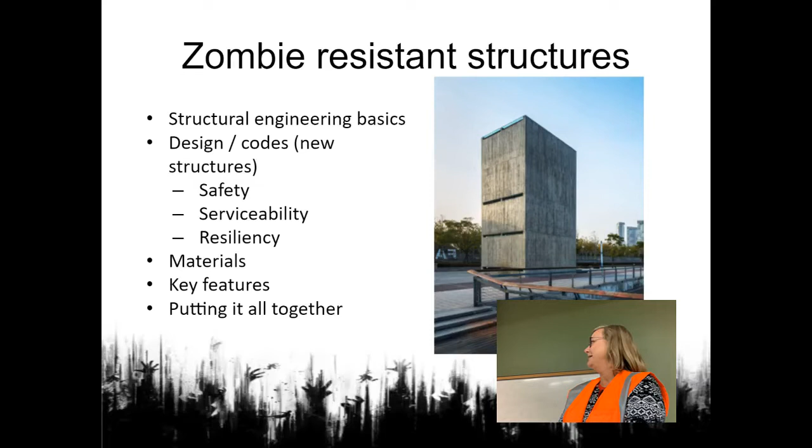We're going to look at what are the key features that we need to have for our zombie-proof housing, and how do we put this all together so that you can start making your plan as we go forward.

All right, here's my one equation. For structural design of the stuff I'm talking about, we basically follow what's called Load and Resistance Factor Design, LRFD. All you need to know is the left-hand side is the loads, so that's the weight of the structure, the zombies, the earthquake, the whatever. The right-hand side is the resistance. This is the strength. What are you making it out of? How big is it? All those types of things.

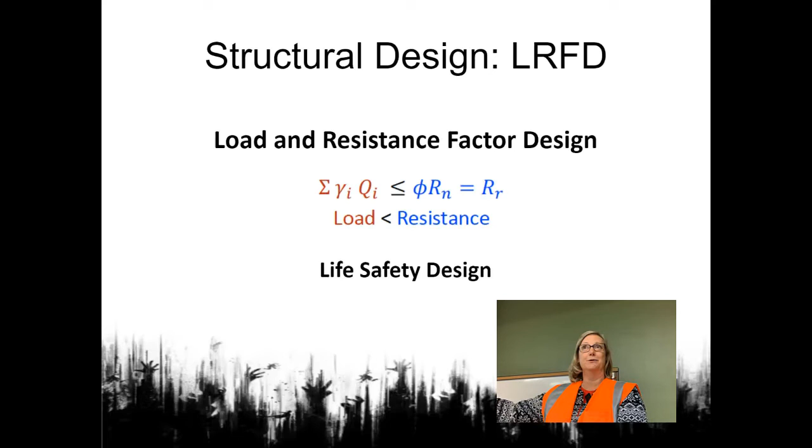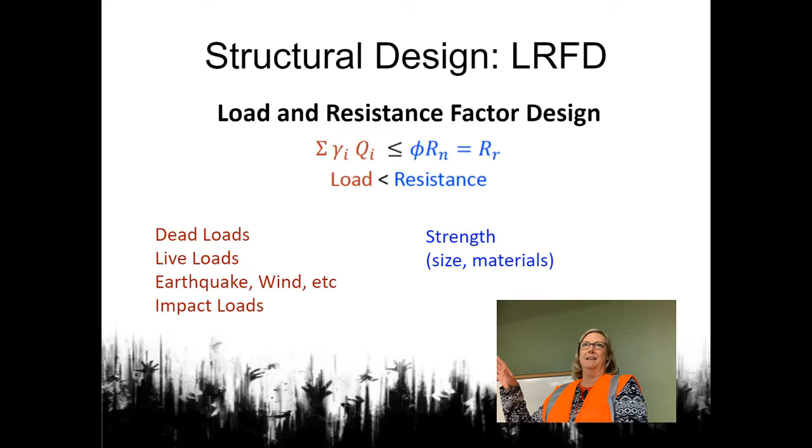And we obviously want the strength to be bigger than the loads that are applied. We take that a little bit further and say, not only is it going to be bigger, we're going to go ahead and put some safety factors on that. So I don't know all the loads super well, and the less I know the load, the more safety factor I'm going to put on.

On the left here, you see we've got dead loads, we've got live loads, and believe it or not, this is really what we call these. A zombie load is not a dead load, it's a live load, just the way it works in the code. A dead load is self-weight. We know that pretty well, so we're just going to give that a 20% increase. Live loads are stuff like people, books, chairs, and sometimes that changes, so we give that a little bit bigger kick, a 40% increase.

Earthquake, wind, impact, zombies, those types of things we really don't know well, and we don't necessarily expect the worst earthquake and the worst windstorm and the worst zombie attack all at the same time. So we have different ways of combining these things.

As a structural engineer, I try to be conservative and take into account everything I can possibly find. So regardless of what everybody else says about whether they're shamblers or rumblers or runners, they go through water, they go through everything. I look at all those movies and I take the worst case, and then I try to invent things that are even worse than that. So probably I need a really high zombie load modifier or multiplier.

But luckily, zombies fit pretty well within my live loads and some of the things that we already designed for, particularly in the last few years. So I'm going to talk about that. On the right side is the strength, and what we multiply on that side is usually a number under 1. So I may calculate it's going to be this strong, but I'm only going to account for 80% of that. We won't go into how those happen, but just know that we want that blue side to be much higher than the other side.

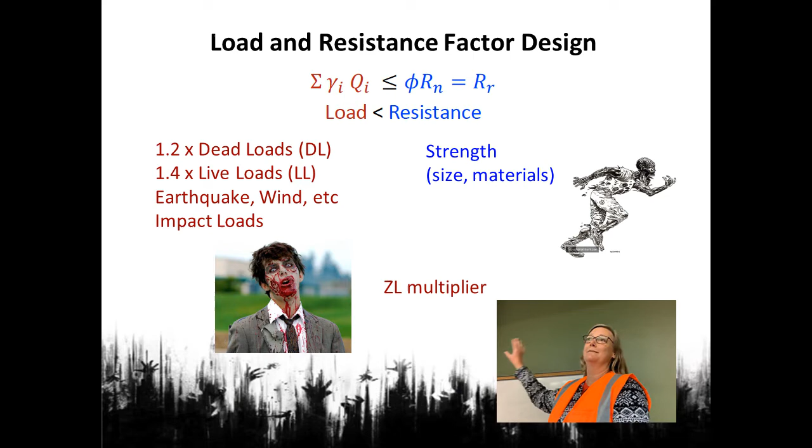Okay, so obviously safety is paramount. Serviceability is something else we designed for. Serviceability is what keeps this floor from vibrating or having too much deflection. It's safe, but you wouldn't like it. You'd start to get a little worried if the floor started deflecting by a foot, right? That would get us all out of here pretty quick, or shaking. It just means, does the structure perform as intended?

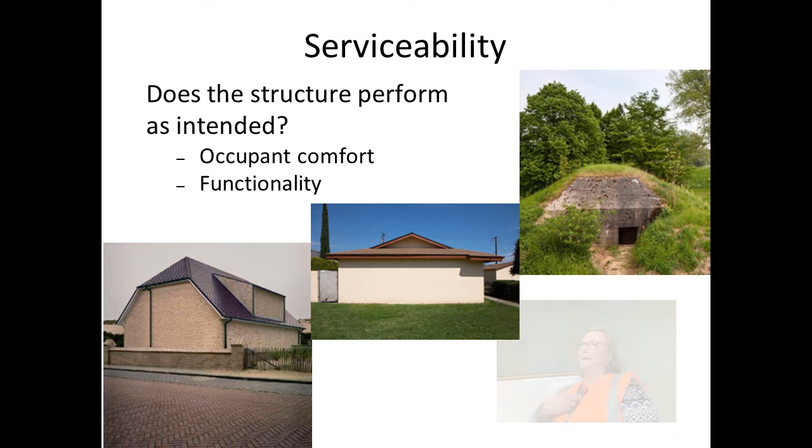So I'm sorry to say, but after the first week, you're not going to want to live in a windowless house or a bunker without light, in solitary confinement. You're going to want occupant comfort and functionality, because we're probably in for the long haul. If we're not, great, but as a structural engineer, I'm planning for the long haul. And by the way, all the pictures are real pictures that I have in here. I don't know who owns those windowless houses, but maybe they're planning for the zombie apocalypse.

All right, so here's the third term, and you may not have heard this one as much, at least in terms of structures: resilience. Resilience by definition is a structure, system, or community that we expect to resist an extreme event, which we're seeing more and more of weather-wise, with minimal damage and minimal disruption of functionality. So whatever I'm making this structure, it's going to have to either not be damaged when this happens, or it's got to rebound quickly. My extreme event is the zombie apocalypse. We've got to get that thing functional, and it needs to be as good or better after the apocalypse starts as prior to that.

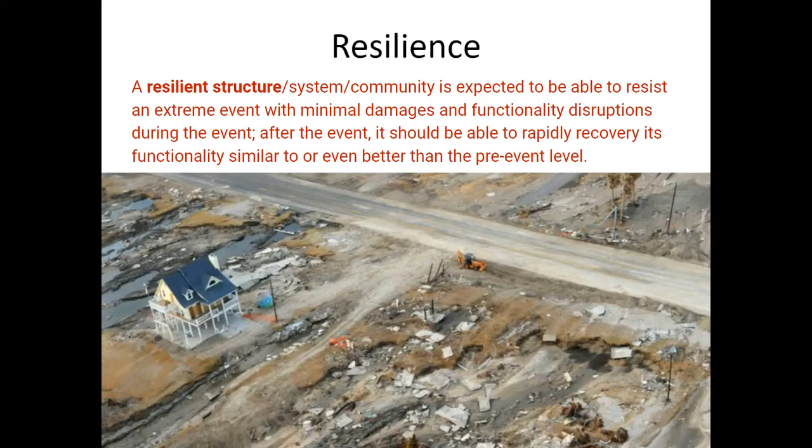The good news here is we are actually getting research funding in resiliency because of all the extreme events. So I do get funding to work on zombie-proof housing, although the funding agencies might not know that, so be quiet. Incidentally, this is a picture after a hurricane in a neighborhood. That's a concrete house. There used to be a lot more houses there.

All right, so material choice. What do you think we're going to use? Now, in all seriousness, the top three for residences and things that we do are steel, wood, and concrete. The top two for commercial are steel and concrete. There are other materials like composites and things like that.

Don't have time to go into it, but rest assured, if we look at the considerations we need for our project: strength, durability, availability. Let's say we have to start making something after the apocalypse. I'm not going to go down to the local steel mill and fire it up and try to get a beam going, right? I can make concrete.

Resiliency. So what's resiliency? It's got to resist fire. It doesn't burn. Wood does not meet that. Water: so it resists water. It doesn't mold. All those types of things.

I skipped lack of vulnerable connections, but start thinking about this. So these zombies, they may evolve, they pull apart things. If I have that sheet metal nonsense that we saw at the beginning, that's nothing. I mean, for many reasons, that's no good. But it also has vulnerabilities between the sheet metal. That steel stud house, I put the plywood on, or whatever I put on, there's still vulnerabilities in there.

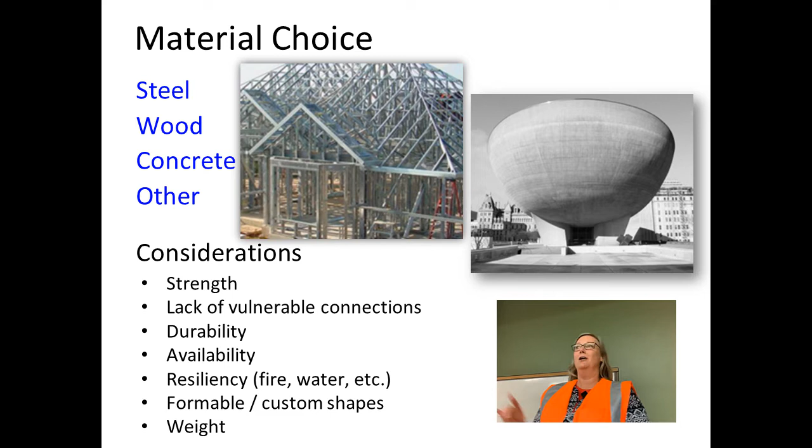This thing on the right, which is a real structure, I can't remember if it's a museum or what it was, it has no seams. It also has this formable or custom shape. I don't know about you, but I saw that World War Z movie, and I can't unsee that part where those zombies go up and just go over that huge wall. I can't get over it. I want something like this, where they can't crawl up that wall. It's nice and smooth. I'm feeling a lot more comfortable with this than I am with that wall.

All right, this is an important public service announcement.

Concrete and cement are not the same thing. The cement is the powder, the concrete's the hard stuff. It's got cement, which is actually only like 10% or less. It's got water, sand, and rock, plus some other subtleties. This is really important for other reasons, including climate change issues and CO2. But just rest assured, they are not the same thing, and you have one major duty tonight: tell everyone you know that cement is the powder and concrete's the hard stuff. That is not a cement sidewalk, that is a concrete sidewalk. I can't even read a book without this driving me crazy, so I hope it drives you crazy now too, and you can pass that along to everybody.

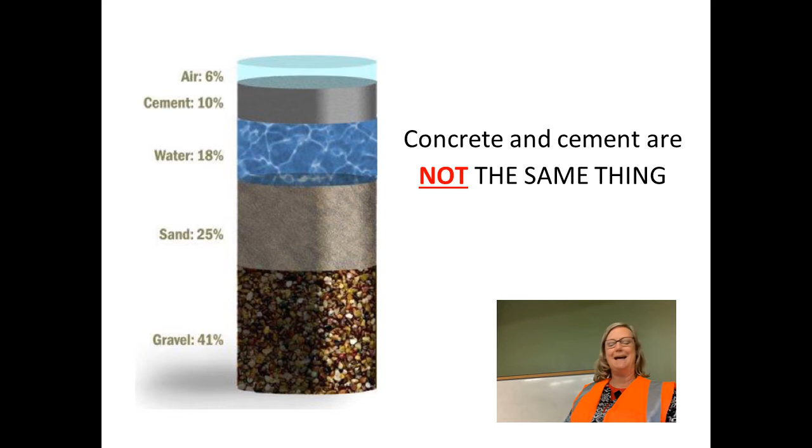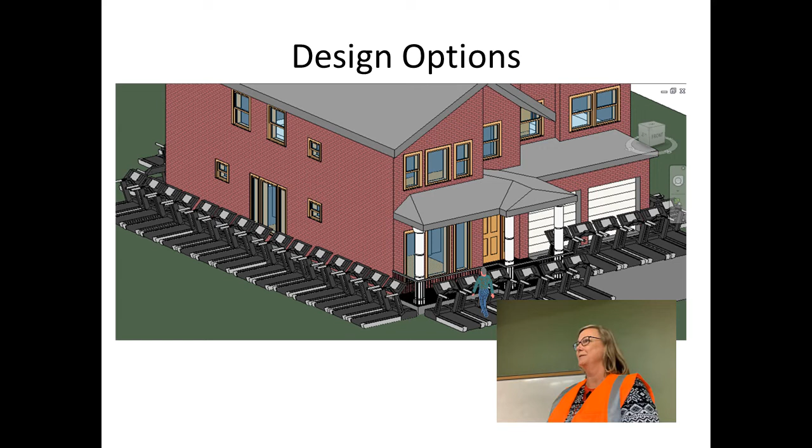All right, so what are our design options here? This is the only not-real picture I've got in here, but it cracked me up - a bunch of treadmills lined around a house. There's some good innovation here, we've got renewable energy sources, we got everything going on, but I can see some problems.

Some of the options that come to mind, or that you'll find if you start perusing around on the internet, are movable walls, shutters for windows, because we're going to have light in at some point here. Let's stay away from a lot of ground floor entrances, let's avoid that sort of thing. Drawbridges are popular, moats, isolated islands.

Underground, you have less things to defend if you're underground, you have maybe one or two entrances. You can get off the ground with stilts, so that one house we saw was actually on stilts for different reasons, as far as we know.

We need sunlight as humans, we need places to plant things, because again, we're in for the long haul here. I read a lot of those apocalyptic books, zombie or not, so I'm in it. We're going to need renewable energy sources, the batteries are going to run out at some point, so we should start planning on this.

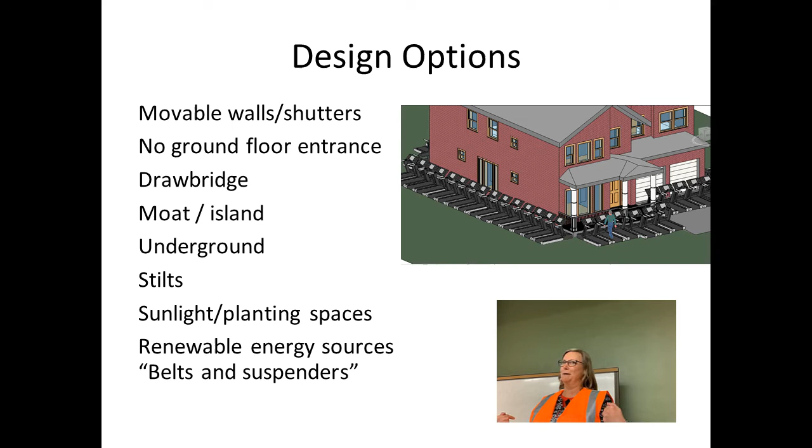And finally, the term we like to use in engineering and other places is belts and suspenders. If my belt breaks, I still got the suspenders to hold up my pants and vice versa. You want systems that have belts and suspenders when you're in a zombie apocalypse.

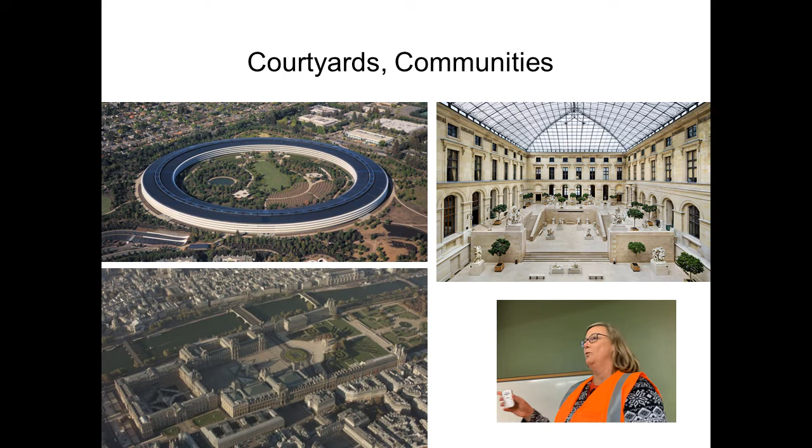So the upper left hand is the mothership of Apple. Apple has their building in a circle with a nice community courtyard inside. This is lovely for zombie-proof stuff, right community? Instead of a wall they all crawl up and pile over, here we live in the ring, so if we need to lock down, we're actually in that wall. I added that curved concrete part so they can't get over the wall. I've got sunlight when the zombies aren't attacking, growing space, a fairly reasonable community, and this isn't a small building, so we could take it over if we need to.

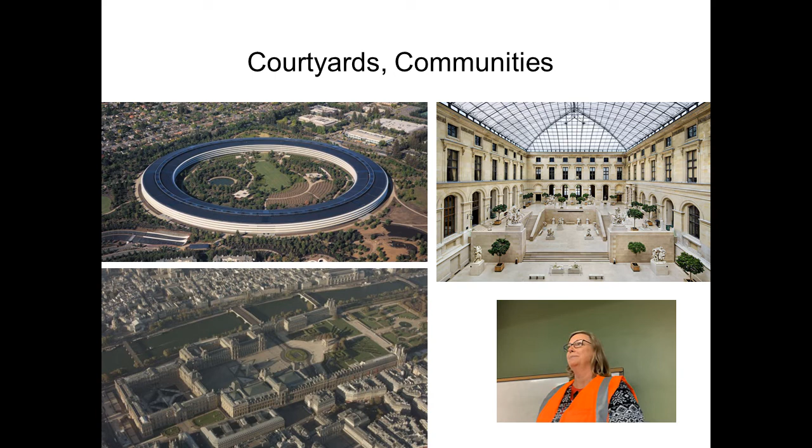The other two are the Louvre, which gives you another idea of a courtyard concept enclosed with sunlight and also open. Back when we had to defend large territories, this was a good option. It becomes a good option again.

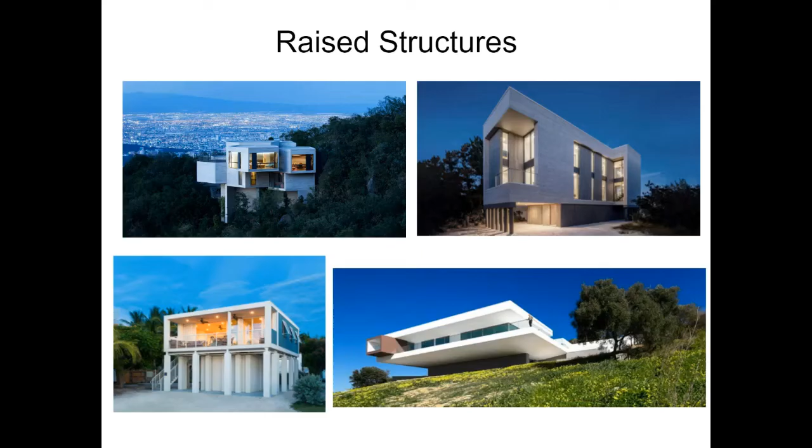Raised structures - we've talked about stilts and all these things. This is quite the trend in contemporary housing anyway. Architects love this stuff, I like this type of thing. Again, I don't want that horde of them crawling over, so I'm liking a lot of those types of structures. Here's another version, although they've resorted to those darn concrete walls, but maybe a little bit more approachable.

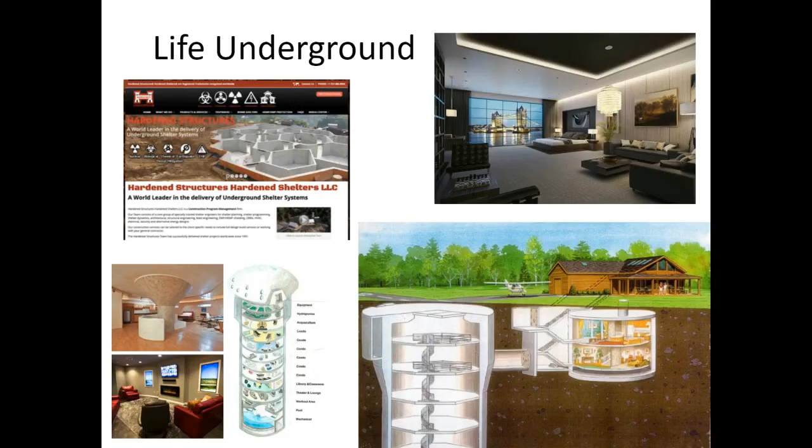Search 'missile silo house.' And up here on the left, this is a real website, Hardened Structures - a company that does hardened structures. They don't say zombies, but I know they mean zombie apocalypse, because they've got every possible apocalyptic scenario covered. They hire the experts, these guys have got it down. Go check out the website - I do not work for them.

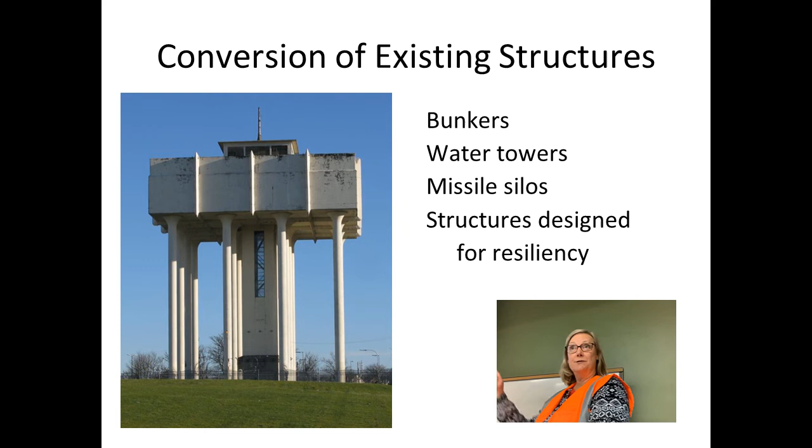Other existing structures: bunkers, water towers. There's a bunch of water towers that look a bit like this one, old missile silos, and any structure we're designing nowadays for resiliency is probably one to take a look at. These are both water towers - again, I love that concept where they can't get up there.

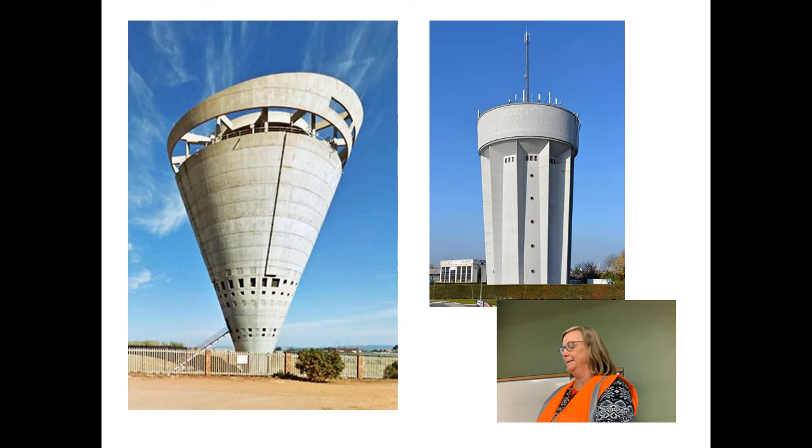So in a pinch, if you can't get this done before the apocalypse happens and you're not prepared like I am, then you need to start scouting these structures out. I'll leave you with this: you need to start looking for this right now, you need to start thinking about it. You can call it resiliency and plan for extreme events, but we all know the real extreme event we're planning for, and you need to do it before it's too late.

How many engineers are in the room, or pre-engineers? Okay, you each need to have one of those on your team so that you can go ahead forward with this. So thank you.